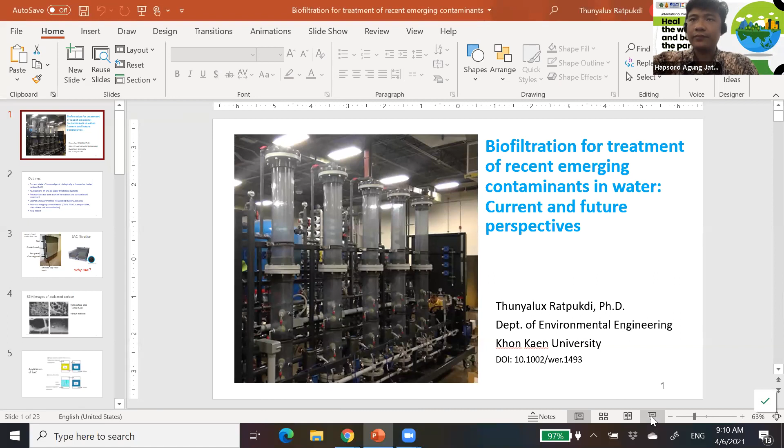For the virtual conference - actually this is my first time joining a virtual conference. So let me begin with my presentation. I believe I have to share my screen, right? Can you share your screen, Professor? Yes, yeah, okay, you see my screen? Yep, yes yes okay. All right then, so it's okay.

First of all, my name is Thunyalux Ratpukdi, you can call me Tom. I'm an assistant professor in the Department of Environmental Engineering, Khon Kaen University, and I'm now serving as department chair. It's glad to be here, and I got invited from a university in Indonesia, which is my first time, I'm very excited.

The topic that I would like to share with you today is biofiltration for treatment of recent emerging contaminants in water, and current and future perspectives. You might have heard about biofiltration, or you may not, but actually it has been with the water industry for, I think, more than 20 years, but we're going to see the development of the current use of it now.

The picture here that you can see is the pilot scale of biofiltration columns. We actually use it in water treatment, but this is a setup for the pilot scale here.

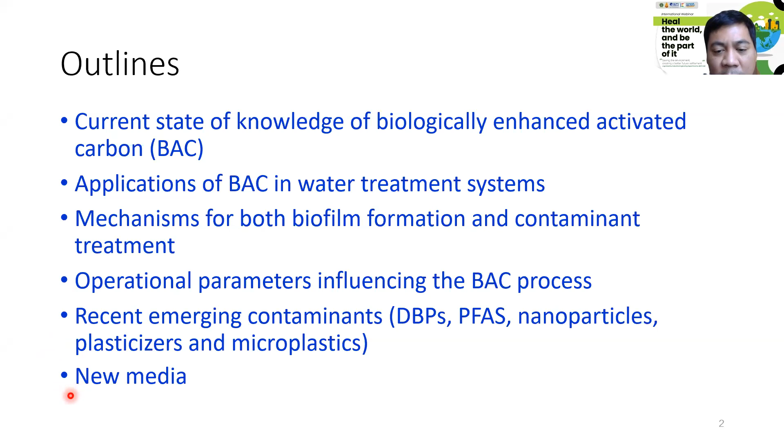Let's begin with the outline of the presentation today. I'm going to talk about the current state of knowledge of biological enhanced activated carbon filters, and the applications we have used in water treatment. Next is the mechanism of biofilm formation and contaminant treatment, then the operational parameters that influence the BAC process, and the performance for treatment of emerging contaminants that we're concerned about now. We're also going to talk about new media that have potential for development in treatment.

This is very typical of water treatment processes we have, like conventional treatment for a big city. This filters the water to make it much clearer, and also helps remove some of the pathogens. This is one of the processes, and then we do disinfection using chlorine.

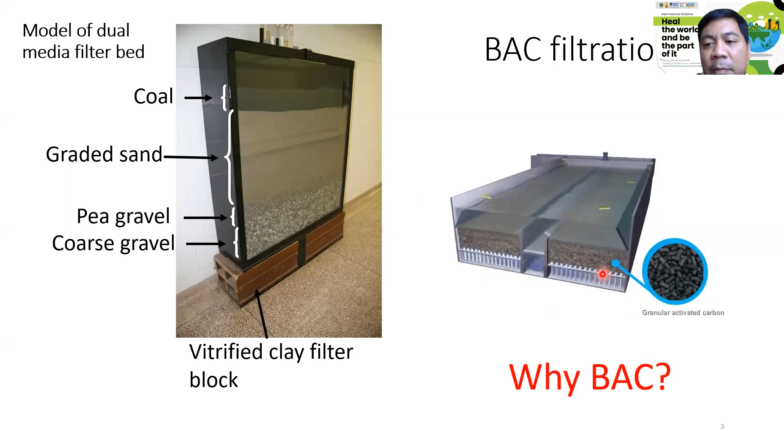The difference between the two is that we also have some biological activity going on in the sand filter, but in activated carbon we can have more. The reason we can have more biological activity going on is because in the structure of activated carbon there's so much surface area - we're talking about a surface area of about 1,000 square meters per gram. So there's a lot of pore structure inside that can adsorb the contaminant, and also provide space for the microorganisms to grow. This is the advantage of using activated carbon as a filter media.

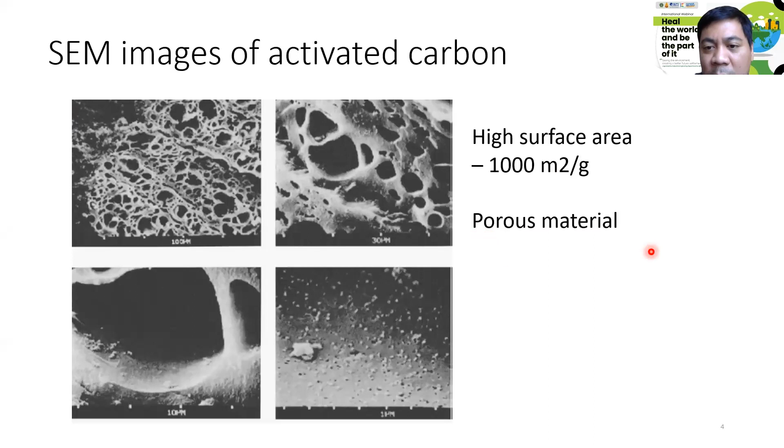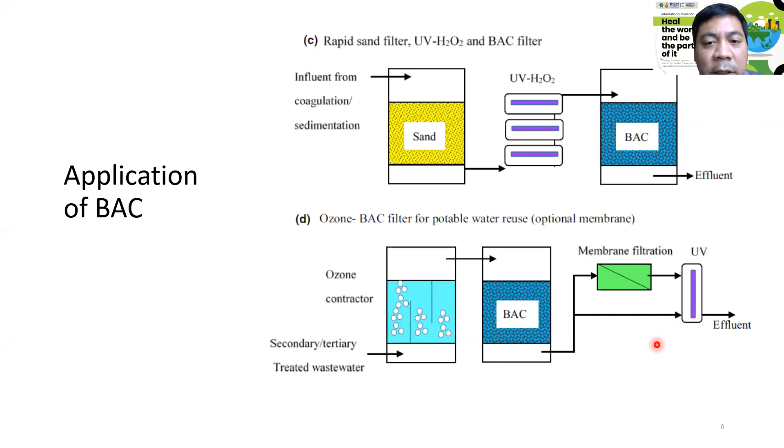Okay, so these are examples of the BAC application, and how biological treatment works and how it happens. When we look inside the structure of the biological activated carbon, we're going to have what's called biofilm formation.

This biofilm is formed from small, numerous microorganisms. They start to attach on the surface, and they start to grow more, and they form a colony, and from the colony they release a substance to help them attach to the surface. After some time, when it gets mature with too much population, or there's some shear force of water, they start detaching, and then start attaching again. The water flows, they attach, form the biofilm, and then start spreading again.

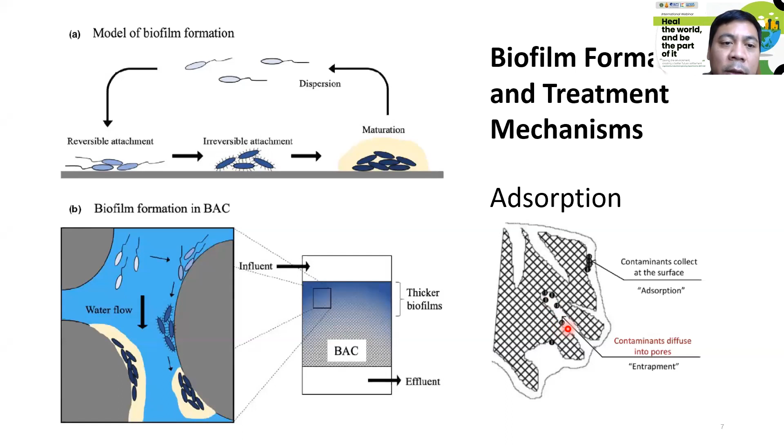This is because of the activated carbon - it serves as an adsorption mechanism. But you can see after several months, this is going down because all the adsorption capacity has been used up. But it's not used up by 100%. We still have capacity for removal of TOC. This is because we have biological activity going on here, so it can remove the organic contaminant. So this is how it works.

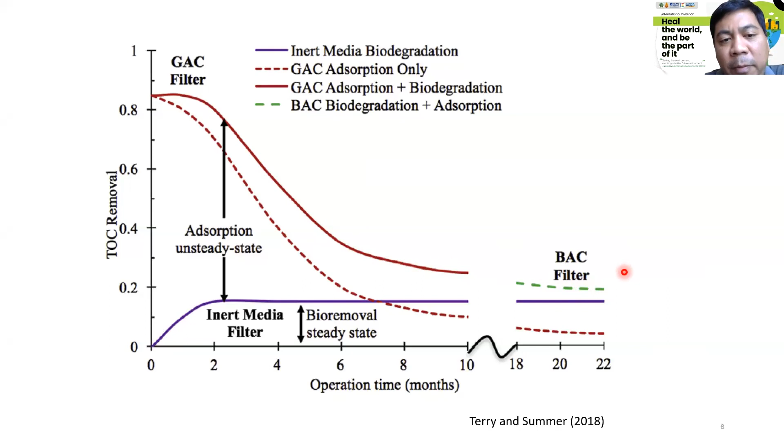You're gonna see in the first period it can remove very well - this is because of adsorption. Once the capacity of adsorption is exhausted, there's only biological activity going on, but it takes several months. So why is this beneficial? Because if we use activated carbon only for adsorption, we may have to replace it every 6 or 8 months. But if we use it as a biological activated carbon filter, we can use it for 2, 3, or 4 years before we replace the media.

Now, what conditions affect the performance? The first thing is pH of water. Lower or higher than neutral, than 7, we're gonna have less integrity of microbial cells, less biofilm formation, and less microbial activity for contaminant transformation. So higher or lower than 7 is not good. We try to keep it around neutral - that's better. It can be off a little bit, but it shouldn't be that much off.

Another concern is the contaminant. For some substances that we put in the water, it will promote biofilm formation. But a lot of times we have toxic contaminants that come into the water, so it reduces the biological species, the microbial community. Like first we might have 100 types of bacteria, but when we have a toxic compound, it kills most of it, so we just have few microorganisms, which is not good. You have to have a diversity of microbial population in the filter, and sometimes it can form persistent byproducts in treated water, which we don't want. So this is very important when we use the biofilter - we have to make sure that we will not create more toxic compounds in the water.

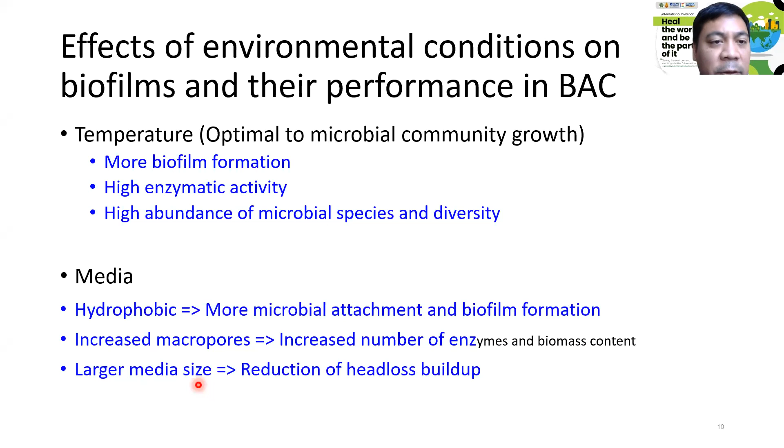So now let's move to the contaminant.

In the past, we talked about conventional contaminants, for example turbidity, natural organic matter, taste and odor, heavy metals, and nutrients. Lately, we have what we call emerging contaminants, a new class of contaminant that has more effect on people, and the concentration is very low, like nanogram per liter or part per billion level.

These compounds include pharmaceuticals, hormones, pesticides, hydrocarbons, and MTBE. MTBE is the compound added into gasoline to prevent the engine from knocking, so it's an anti-knocking agent. I believe this compound has been banned in the US, but I'm not sure about other countries. This is one of the bad compounds that have been invented, and it has contaminated groundwater in many places in the world.

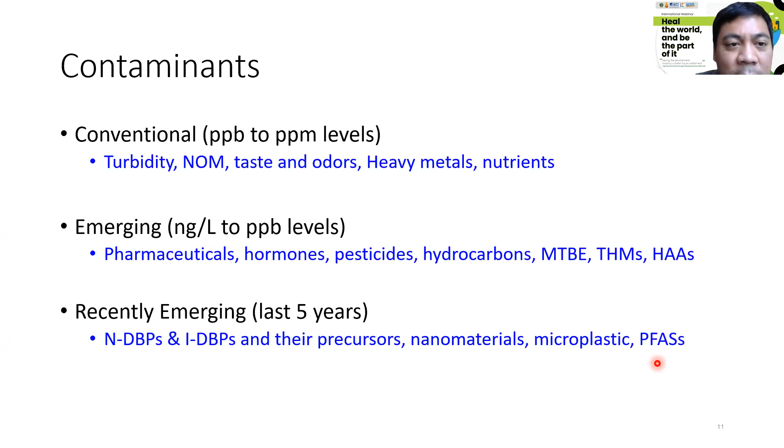These are examples of disinfection byproduct compounds. We have the DBP class, and the white ones here, THM and HAA, these are disinfection byproducts, but not really recently emerging. The yellow ones here are very new compounds. Most of these compounds are nitrogen- and iodine-based.

Some of these compounds can be removed by BAC, but some cannot be removed by BAC. What this means is that our technology today may not be able to treat some of the disinfection byproducts, but our technology can treat some of them. So we have to be careful about monitoring the compounds that cannot be treated by BAC, and find another way to deal with the problem.

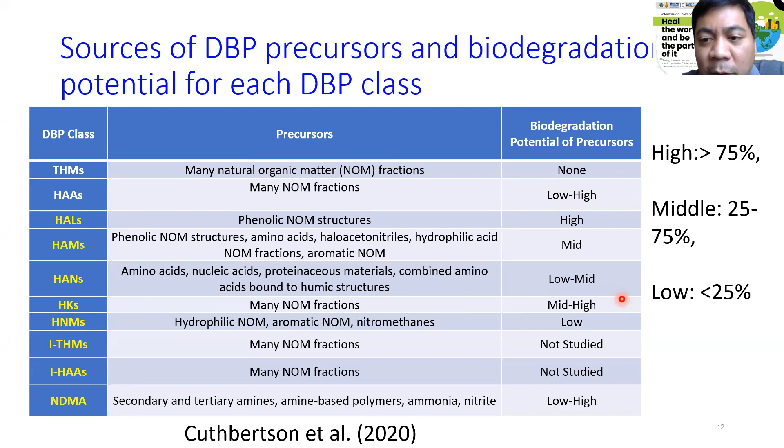Another factor that affects BAC is the number of bed volumes treated. This is called NDMA, another disinfection byproduct compound which is also carcinogenic. This water has been treated with ozone and passed through a biofilter. It has been tested for almost 400 days, and the bed volume treated is up to about 70,000. But in the first period, when the adsorption capacity is kind of exhausted, the capacity is gone.

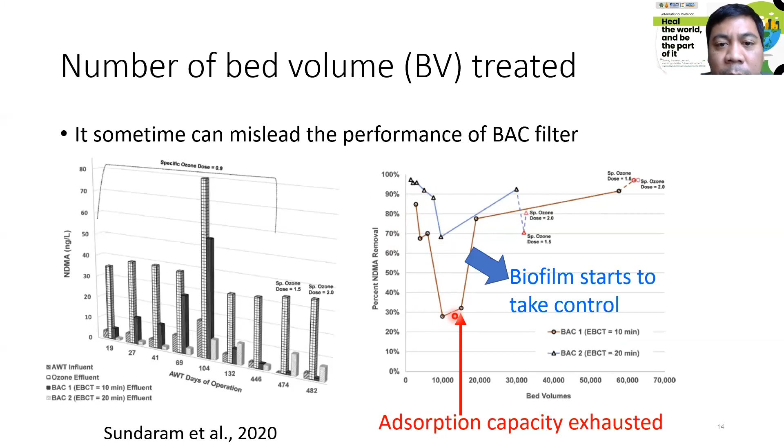Another concern is sometimes we have release of soluble microbial byproducts. This is the fluorescent image showing before - this is a new filter, and this is an old filter. We have an increase of the compound that fluoresces. What happens is it will contribute as a nitrogen disinfection byproduct precursor, so that's another thing we have to be careful of when applying the biological activated carbon filter. What we can do is keep cleaning it by backwashing, so that it will not release as much of the soluble microbial byproducts.

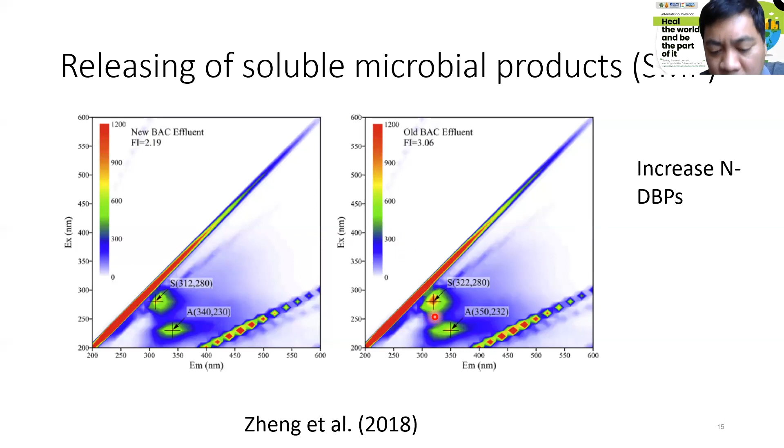Another compound - nanoparticles. We have zinc oxide nanoparticle, cerium oxide nanoparticle, sometimes coated with PVA, which is kind of a glue. We have titanium dioxide, silver nano, silver citrate. These compounds are very stable in the BAC filter. They could be removed by the biofilm, but they have an effect on the biological activity in the filter. It could inhibit AOB, ammonia oxidizing bacteria, and lower the number and biodiversity of the bacteria. So this is one thing that affects the biological activity in the filter.

These days we're going to see a lot more nanoparticles - for example, used in detergent to clean clothes in washing machines, or used in cosmetic products. So we're going to see a lot more of this problem.

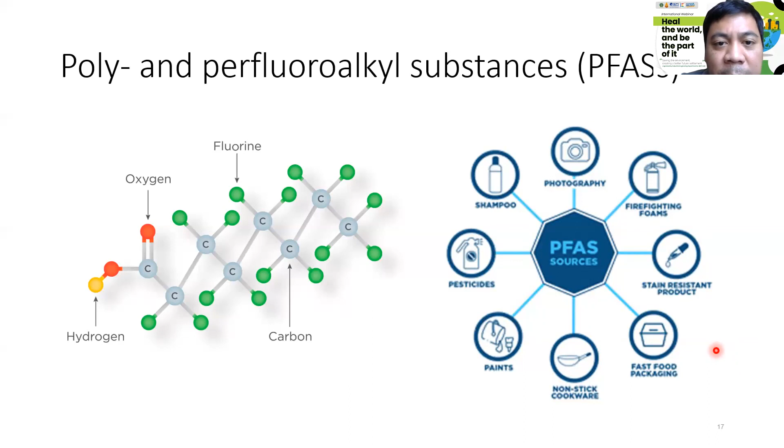The biofilter was found to not be effective for PFAS removal. The main removal mechanism is by adsorption, and activated carbon worked for long chain - carbon more than 6 - but not for smaller chains, carbon less than 6, so it doesn't work there. So it's something we have to look into, what we should do next with this compound.

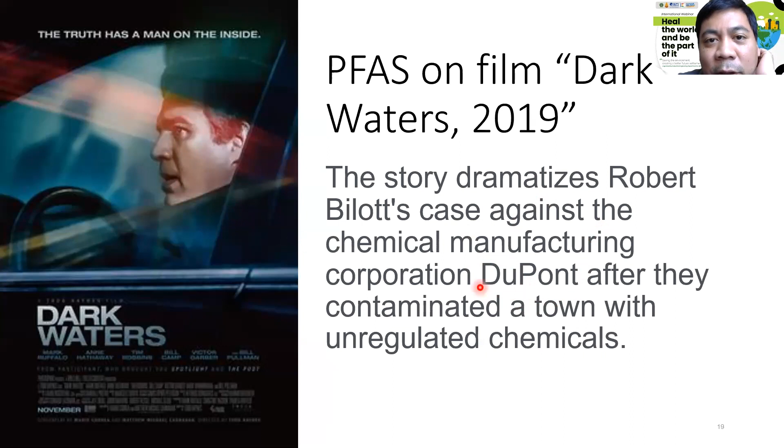It's very challenging. But if you want to know more about this compound, there's a movie called Dark Waters, from 2019. The story is based on real events in the US. If you're interested, you might want to follow up - I'm not sure if Netflix has this movie yet, but it's very interesting, and the actor is the guy who plays Hulk in Marvel movies, same actor. I haven't seen it yet, but I think it's a good one for environmental application - DuPont is responsible for the PFAS contamination in the story.

For the last slide here - a new media, biochar. Why are we talking about biochar? Biochar is the material used in agriculture to hold soil moisture. It has been used there, but it's very new for the water treatment industry. Why are we interested in biochar? Because it has less cost compared to GAC, and it can be modified to be a new media, a new material. So we're looking forward to development of biochar. Biochar basically is biomass that we burn as char, but it's less processed compared to activated carbon. We're looking forward to development of the biochar as a new media, or modified biochar. The biochar also has pore size, so it can adsorb contaminants.

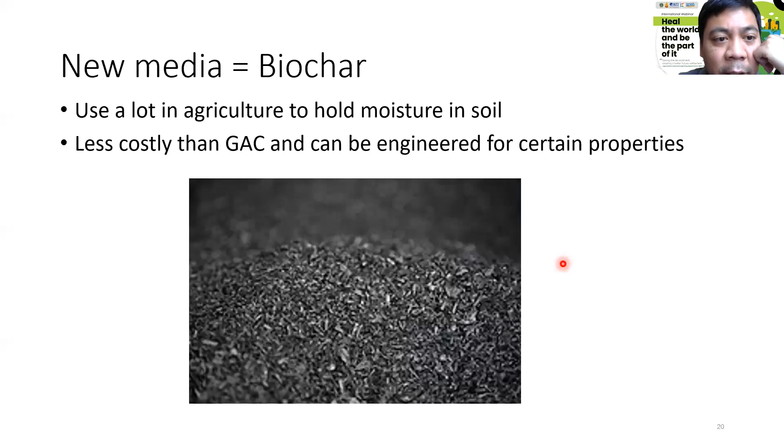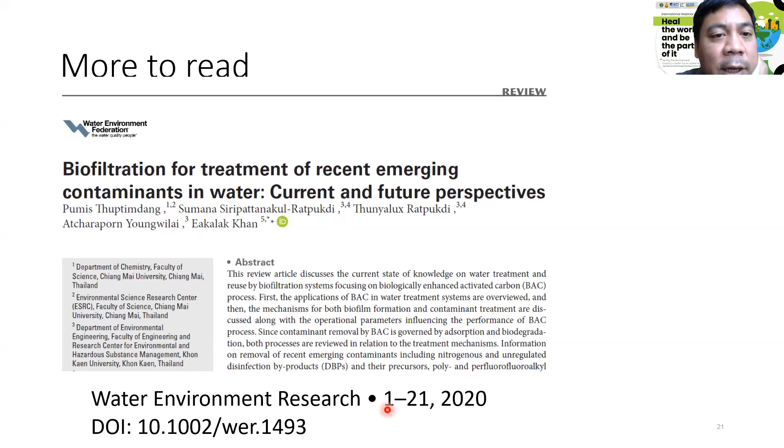Finally, if you are interested in the topic I talked about, we recently published a paper here. I already sent the file to the conference organizer, so you may ask them, or you might be able to download it online - I put the link with the DOI here. With that, I would like to thank you all for your attention, and I'm here to open for questions.

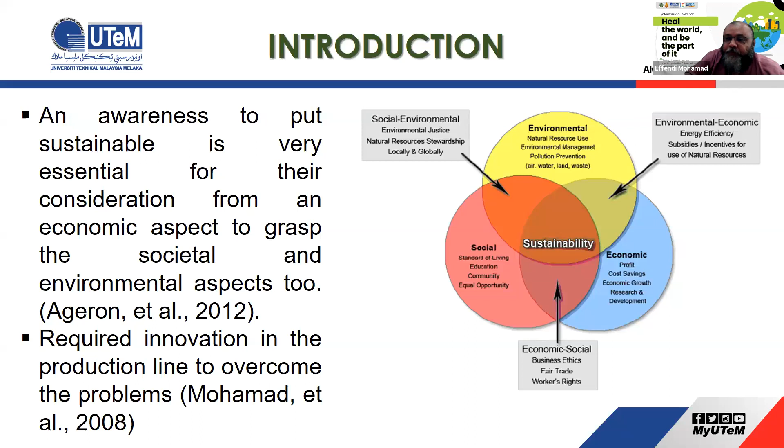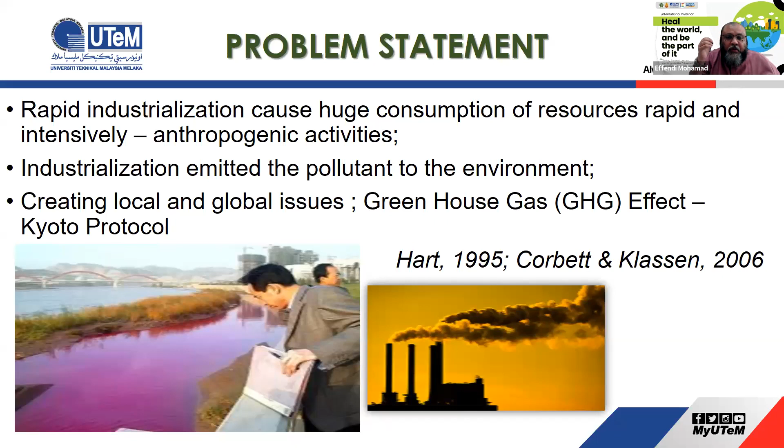Throughout the years of industrialization, the environment has become severely polluted and contaminated, so legal requirements are enforced to ensure proper waste management in all industries. For example, we talk about local and global issues like the greenhouse effect and the Kyoto Protocol, industrial-emitted pollution to the environment, and rapid industrialization causing huge consumption of resources rapidly and intensively.

This led to the idea of using cleaner production and also lean manufacturing. Cleaner production is a method to minimize waste and pollution to the environment, and lean manufacturing is a method to improve the production process by eliminating waste.

In 2002, Bushell said that lean manufacturing seeks to make the most efficient production process by eliminating waste at every stage of the production chain. Lean manufacturing is actually one of the philosophies taken from the Toyota Production System.

All the theory or fundamental story came from TPS. James Womack, who was from the US, in the early 90s the US had problems, so they learned manufacturing from the Japanese company Toyota and then created the idea of lean manufacturing. But the basic fundamental understanding is TPS, Toyota Production System.

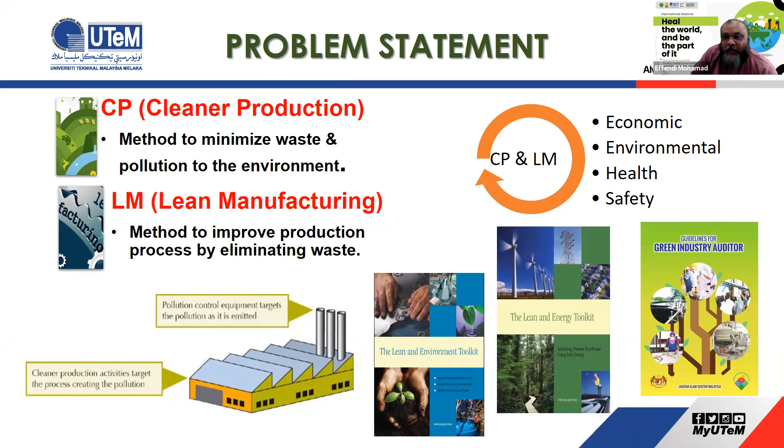So I hope by now you understand what my idea is. Don't worry, I will give two case studies, real case studies we have done and solved using this EVSM, or extended VSM, which we call CPVSM.

So LM and CP, lean manufacturing and cleaner production, have the same objective to reduce waste, that we know. Both lean practitioners and environmentalists want to see environmental waste in the process reduced and hazards to work minimized.

In Malaysia, the problem, as I told you before, is that SMEs with small scale, below 20 permanent workers, find it difficult to achieve the requirements, because the majority of them, since the number of workers is small, need to do multitasking jobs. So I think this is one way that can help them strategize, implement a Kaizen team, and solve the problem of CP by using extended VSM.

So this is VSM. Maybe some of you know what VSM is—value stream mapping, like I told you before. In VSM, all the information on material and information flow mapping is there.

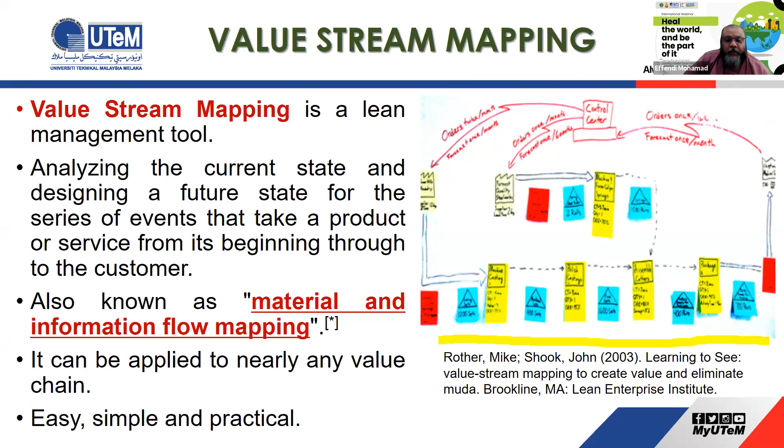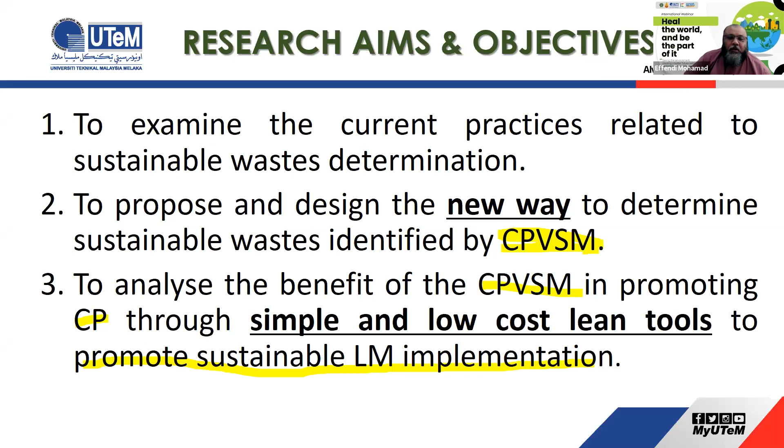And then we try to design and develop the CP VSM, and then we evaluate and validate that, and then we try to propose the new model. This research started from 2016, and we continue to improve it till now. So the research is still continuing till now.

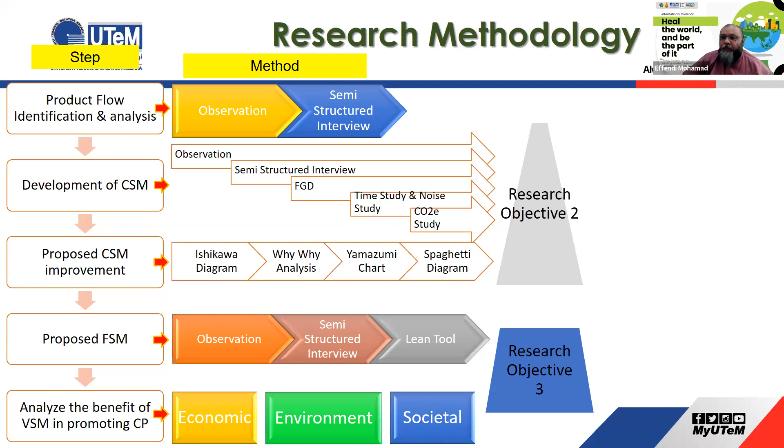Again, we're talking about cleaner production and how we want to combine cleaner production with lean manufacturing. We pick VSM as one of the lean tools, and we make the CP-VSM as the extended value stream mapping to combine CP and to settle the issue of economy, environment, and societal metric assessment. This is the research flow.

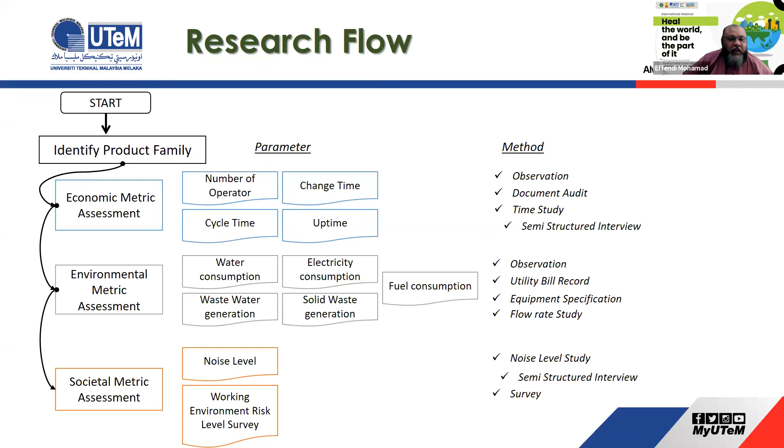So this is how CP and lean manufacturing have become an important synergy, and this shows how we construct the CP-VSM.

As can be observed, the framework to extend CP-VSM is to assess sustainability performance comprehensively, to be considered a sustainable tool due to the counting of environmental metrics and social metrics. So the comprehensive CP-VSM for sustainability must not only serve as a tool to help identify areas of potential economic waste, but also environmental and social waste impact.

Now I'll show you an example case study. This is a real case study of a company we call ABC Recycling Sdn Bhd, located in Seremban. It's an SME company. The products are copper chips, fiber powder, precious metal, plastic, and so on. The number of operators is around 15, and we've been here since 2009. This is the location in Malaysia.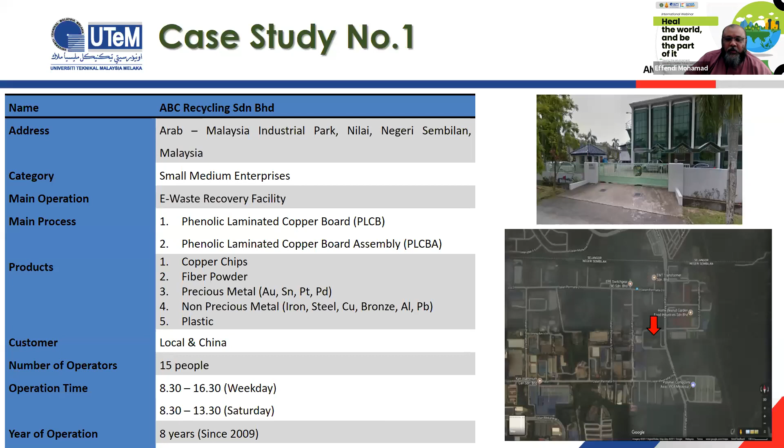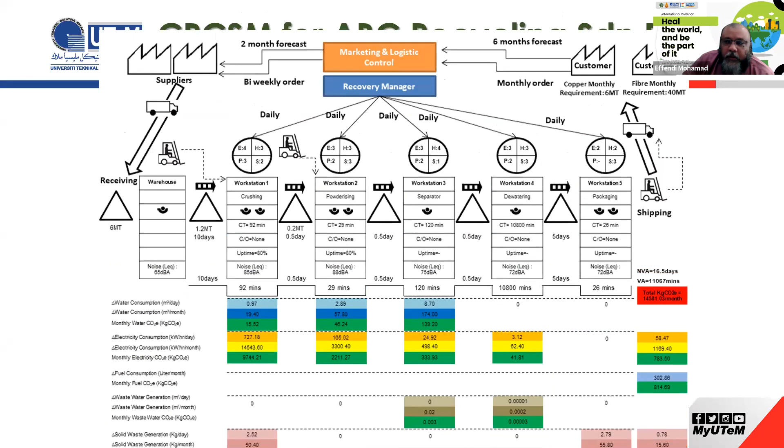So based on the CP-VSM, what we need to do, like I told you before, is once we have all this information, we know where the problem is in the production line, and from there we want to tackle which part is the bottleneck, whether it's a water consumption problem, or the monthly carbon footprint and solid waste, to identify which one is a problem and which one is not. Based on that, we try to improve by using takt time analysis, Ishikawa diagram, why-why analysis, and so on.

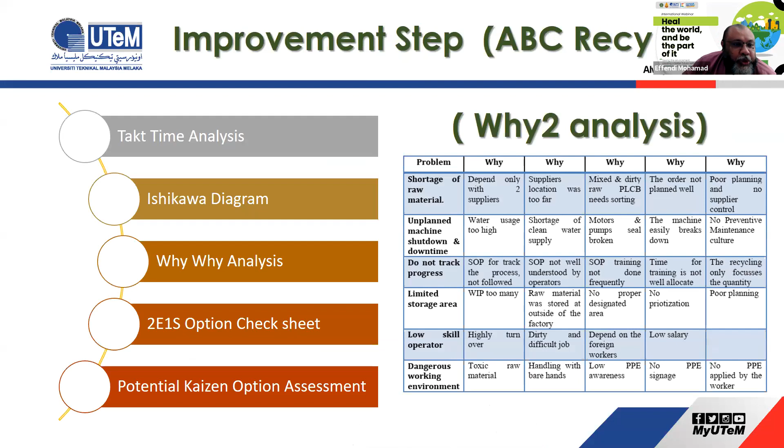So we have done why-why analysis, and on top of that, this is the issue we found: long waiting time, and the workstation receiving and crushing. For expected outcomes, we want to tackle economy, environment, and social aspects. For economy, we're talking about transportation, waiting, inventory, and motion. For environment, we're talking about reducing electrical usage, reducing fuel usage, and reducing solid waste generation. For social, we're talking about noise level and high speed components. This is the detailed information, and the outcome is this new procedure is expected to reduce issues by 50% and so on.

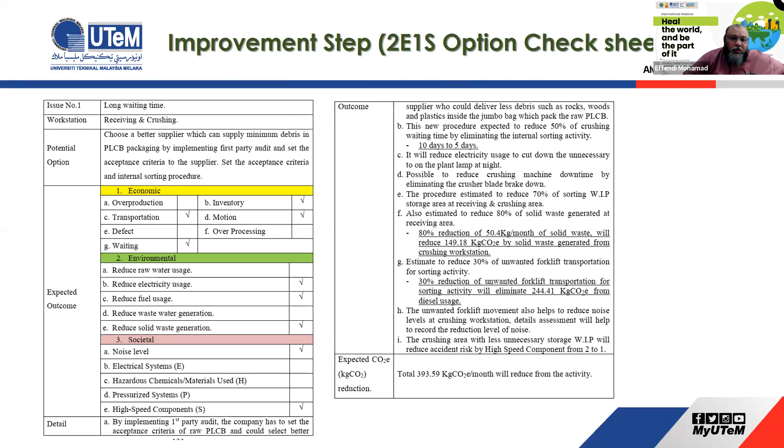We will reduce electricity usage, cut down and so on. So how do we want to settle it? Not only by using a check sheet, but we try to see what potential Kaizen can be implemented. What can we do based on the value stream mapping, we develop the CPM, the CPVSM, and then we try to get why-why analysis, and from there we try to get Kaizen activity.

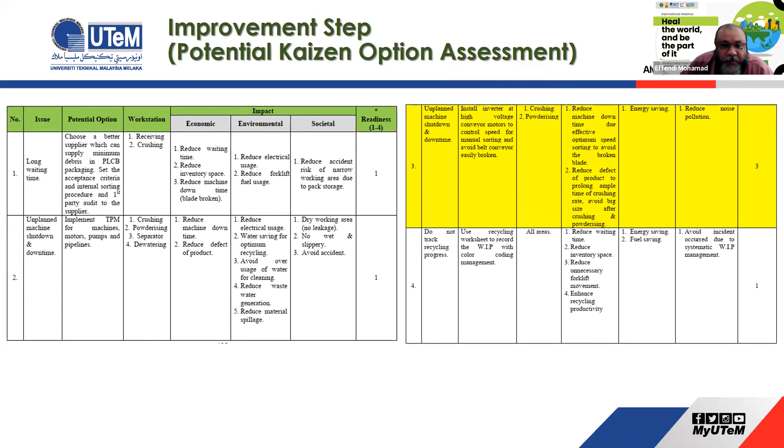For example, here, long waiting time, unplanned machine shutdown and downtime, unplanned machine down, they have installed an inverter, for example. So this is a potential option that we give to the company, right? And then we try to implement. This is many activities that we have done, right?

Okay, do not track the recycling process. So for example, our suggestion is implementing FIFO by palletizing storage of PLCB and product, all right? So many things have been suggested to them to try to improve.

As a summary, this is the suggestion for improvement at ABC Recycling Sdn Bhd. For example, perform first party audit of supplier and set acceptance criteria, implementing TPM on all machinery and related equipment such as motor, pump and pipeline, implementing FIFO, implementing 5S and work in progress temporary storage area, impose proper PPE application, signage and scheduled training.

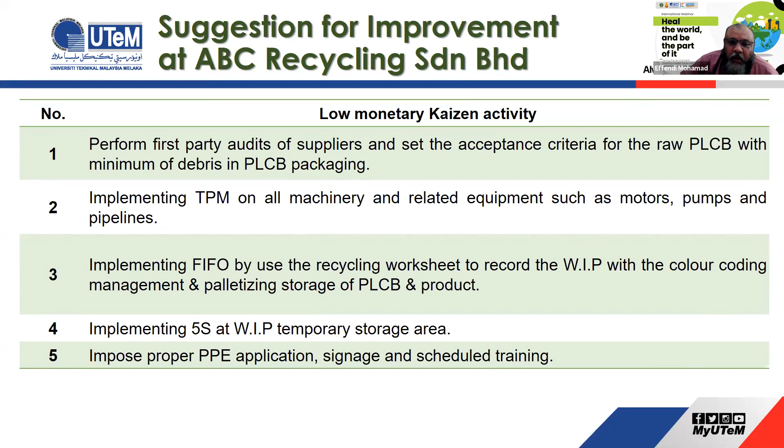So we can see the good thing about value stream mapping, as I told you before, when we map all the value stream, we can see everything. And then when we combine it with the CP information, and try to implement Kaizen based on the CPVSM, this idea came, right? You can see how powerful the tool of VSM is.

So this is the CP, this is the CPFSM. Before this is the CPCSM, which is the current state map. This is the future state map, whereby based on the Kaizen, we try to do improvement, and this is the result.

For example, for workstation 1, we try to improve by using 5S, PPE, TPM, and FIFO. For workstation 2, we plan to implement the same thing, and so on. And then from the warehouse, we try to implement 5S and FIFO.

And what is the result? That is the thing that we want to know, right? Because when a company does collaboration, they just want to know the result. We as academicians are more focused on the theory part, to prove our theory and so on. But usually the company is straight away - they want to know what method, they don't care. What they want to know is whatever tools or things we implement, will they also get a benefit.

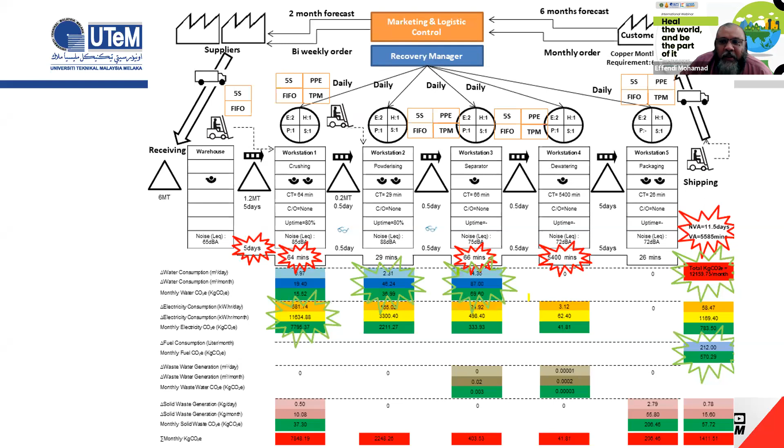And also the crushing workstation, before this, the value added was 92 minutes, and the carbon footprint was more than 9,000. And after that, it's been improved. You can see this is all the information in each workstation, right? Each workstation.

Alhamdulillah, we managed to show and convince them. Like I told you before, if it's a real CSM, we're just talking about the economy part. But now we're also talking about the environmental part too, whereby the carbon footprint has already been reduced. This is a more important thing, right?

And on top of that, before this, the company didn't have any calculation. So when we came, we calculated for them, we showed them - you need to measure using this calculation based on the standard calculation, right? Yeah, we can see how reduction has been done by using the CPVSM.

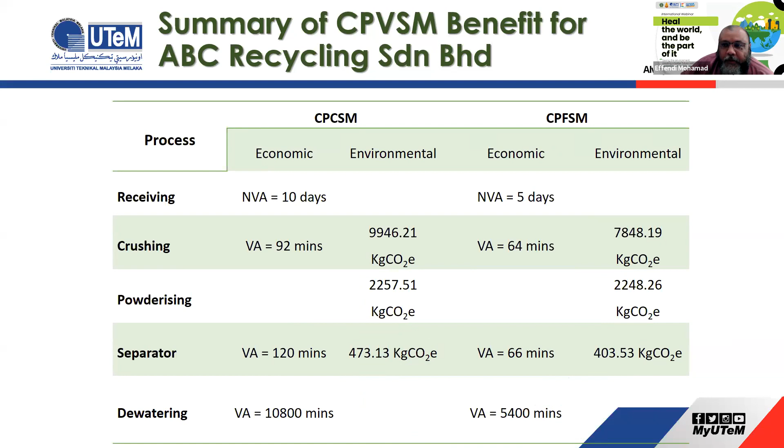Okay, on average, they can reduce 5 days for non-value added, 5,482 minutes of value added, and reduce almost 2,000 in carbon footprint.

And if I try to do some summary - this indicator, we're talking about the electrical system, hazard, pressure system, and high-speed component. The calculation is based on this indicator description. So we did some survey, and then we got all this data, right? You can see the improvement of each workstation.

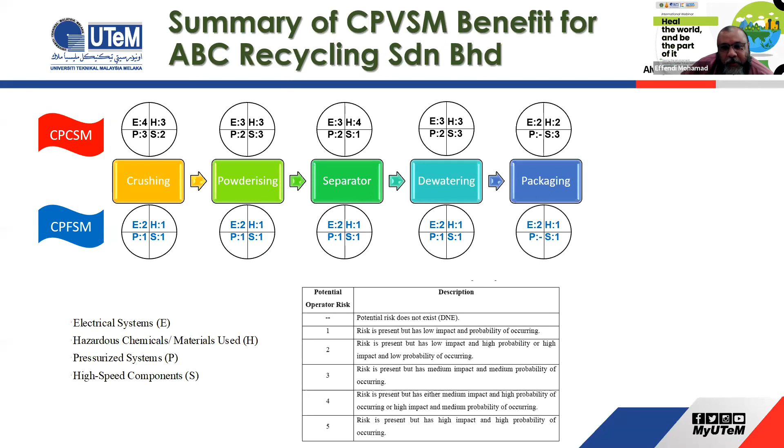So this is the CPCSM, the current state map. This is the future state map after we do the improvement. So we tackle all the aspects, right? Okay, you can see this. So I'll go very fast, and this is the overall improvement. You can see before and after, right? The electrical system also has been reduced, and so on.

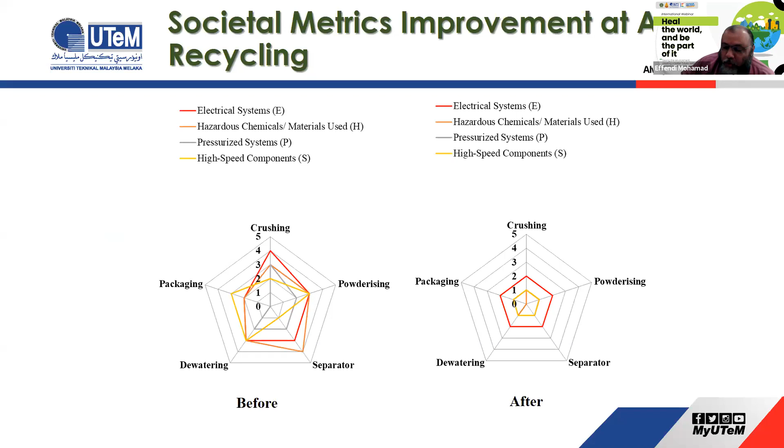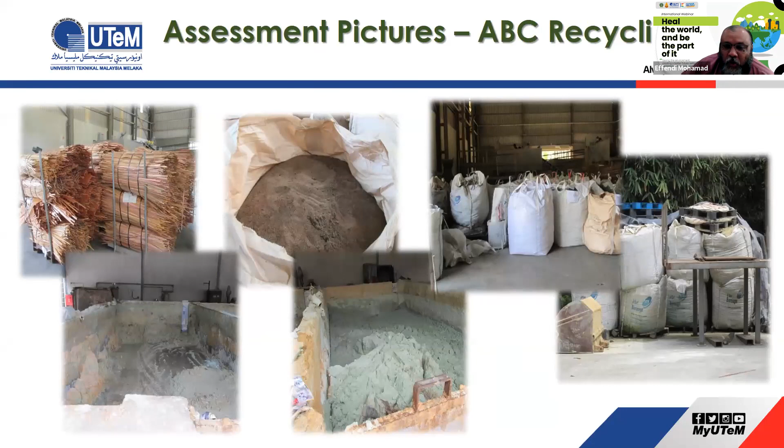So for assessment, this is an example of a picture. The company is in charge of all the wastes, right? So we help them, whereby we implement, like I told you before, 5S, FIFO system, and we found that some of the machines don't have any preventive maintenance. That's why they always have idle time, and the OEE is quite low. So that's why we try to improve that by implementing TPM, total productive maintenance, right?

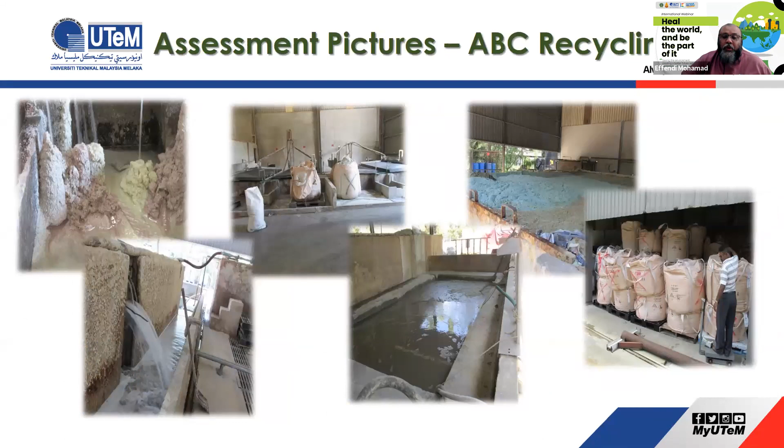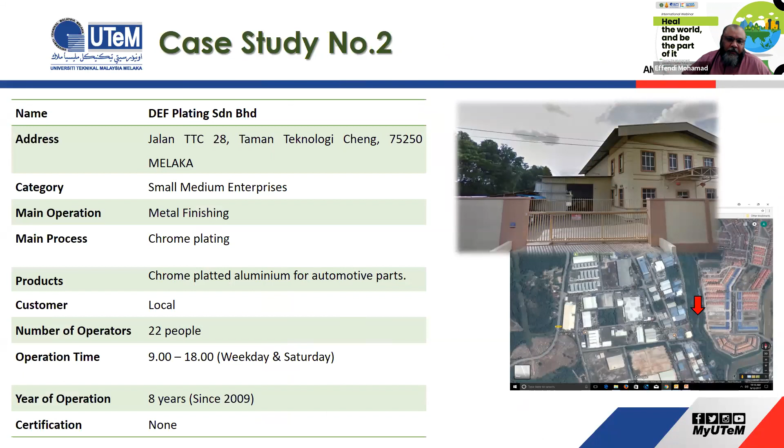So this is all the example. On top of that, to make sure to verify, not only verify but validate our theory at the time, we try to implement it at another company. This company is also a plating company. They have quite a lot of issues also, but it's okay. So this is the CPCSM.

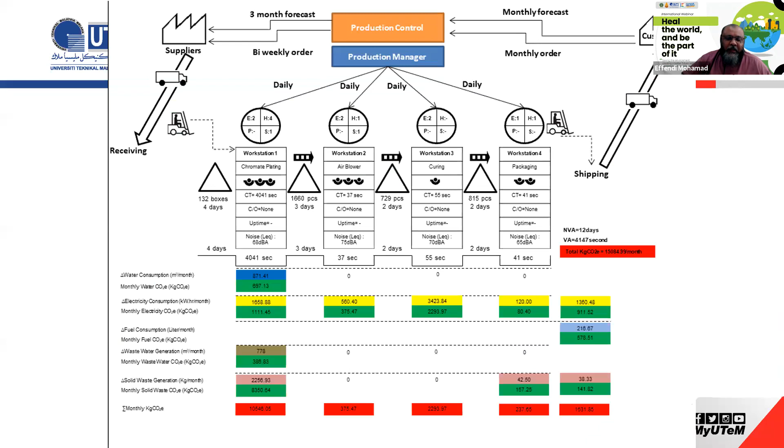So I'll just cut to it. This is the value stream map that we have done. To cut the story short, this is the suggestion for improvement whereby we try to implement Pokayoke, and also implement TPM, impose proper PPE application, signage, and scheduled training. You can see that we enhance the process control by adding measurement devices such as a flow rate meter and level sensor for optimal solution control.

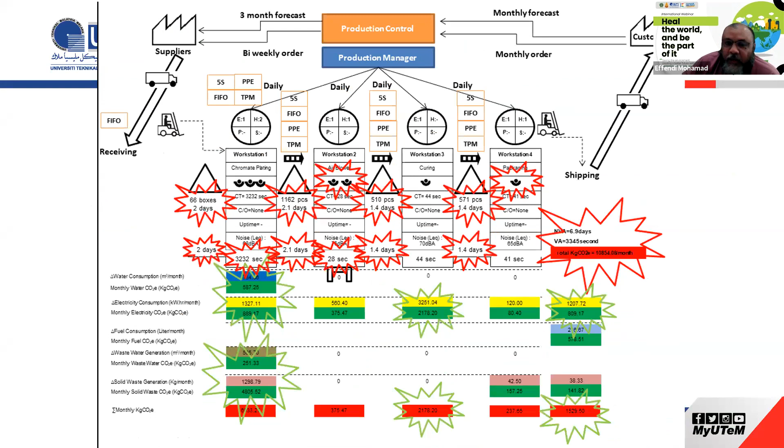So everything here, all the information that we get when we do the CPCSM, we try to give a suggestion to the company and try to implement it. And after that, based on our suggestion, this is the CPFSM, whereby improvements have been done. This is the improvement that has been done, and this is the benefit that the company got from the process, from the CPCSM to the CPFSM. So the cleaner production current state map and cleaner production future state map. So we can see the improvement here.

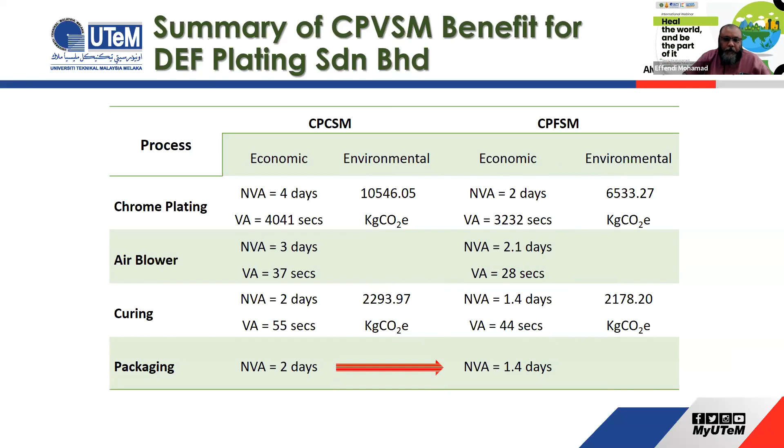All right, I'll go very fast. So on average, we managed to reduce 4.1 days of non-value added time and 802 seconds of value added time, and reduce the carbon footprint.

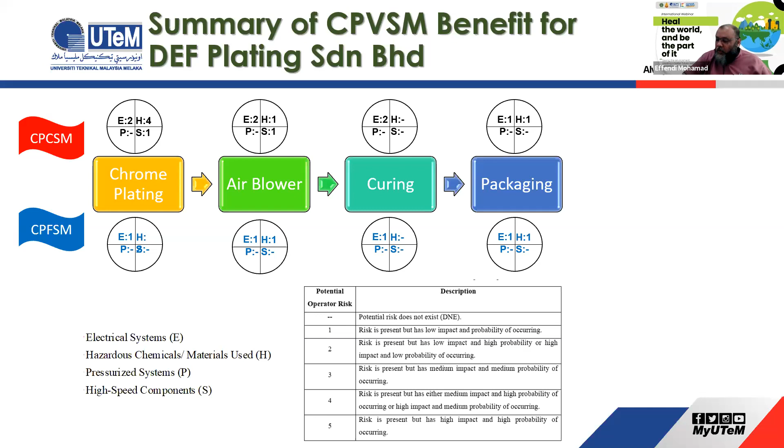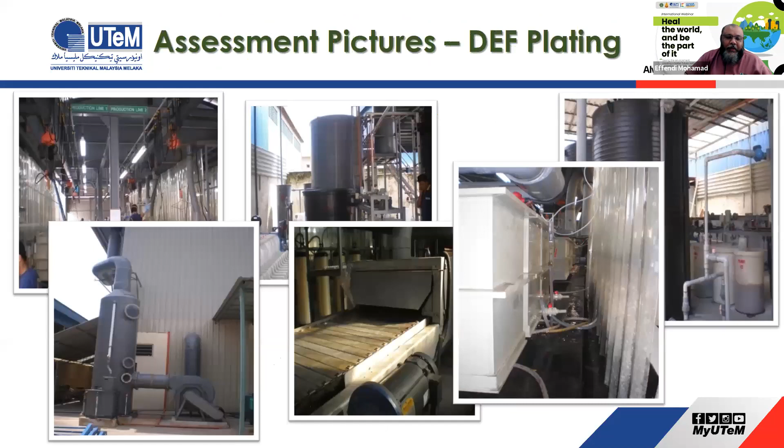Okay. So this is the comparison that I told you before, whereby we can improve overall, a comparison between CSM and FSM at ABC Recycling and a comparison between CSM and FSM at DEF Plating Sdn Bhd, whereby here it's 10 days going to 5 days and so on.

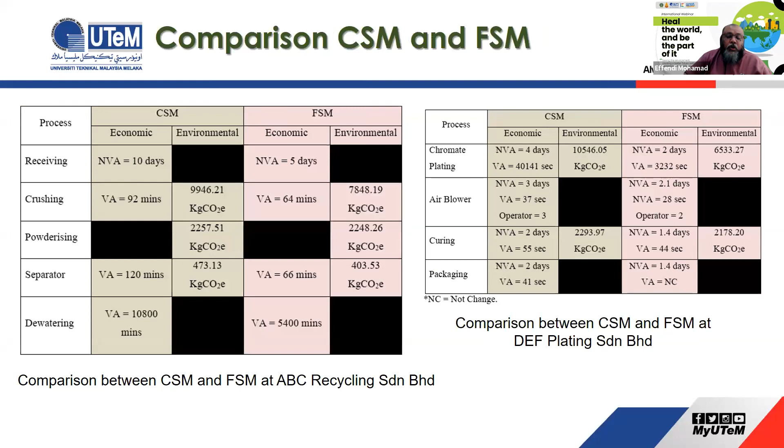So in conclusion, the CPVSM is a useful tool to identify sustainable waste, whether economic, environmental, or safety related, and so on. It also gives better visualization for each sustainable waste at every workstation, exact hotspots and correct points of sources.

Before this, when we don't have the VSM, we don't have the current state map. So when we don't have the current state map, we cannot visualize. But now we can visualize and we can add on the issue, the information of CP, to make the extended VSM more synergistic and so on. And it synergizes with low-hanging fruit for Kaizen activity with minimum monetary and resources, and also serves as a simple, reliable, easy to refer map for continuous improvement by the safety team in the plant.

Okay, so I think I hope you'll understand and get a clear picture of what I wanted to show you. Maybe it's just a simple case study, but even so, it is one step ahead in terms of method, because this method we created ourselves based on the literature review, trying to implement a new method.

And currently we are trying to improve the EVSM more by adding more parameters and so on. So because we believe in this method, it will help this kind of company, the recycling company, because if not, they would just throw the waste outside of the company, and that's not good for our environment. So I think that is all for me.

Assalamualaikum warahmatullahi wabarakatuh. I will present, entitled Reverse Logistics and Handling the Use Cell Phone. I'm Siti Mahsanah Budijati, from Industrial Engineering Department, Universitas Ahmad Dahlan.

There are 8 outlines that I will present. The first is about green supply chain management and reverse logistics, and then types of reverse logistic flow, about e-waste. Fourth outline is about used cell phone. The fifth is actors in the used cell phone reverse logistic, and then drivers of reverse logistic activities. The seventh outline is the handling of used cell phone, and the last is current and future research in the used cell phone handling.

Before discussing further this material, it is better if we first understand the background of the environmental concept emergence in the companies. Currently, the company's attention to environmental sustainability is increasing. There are several factors that encourage companies to pay more attention to these issues: the reduced availability of raw materials, the existence of regulation on environment, the consumer pressure for companies to produce products that are more environmental friendly, and the management commitment to environmental problems.

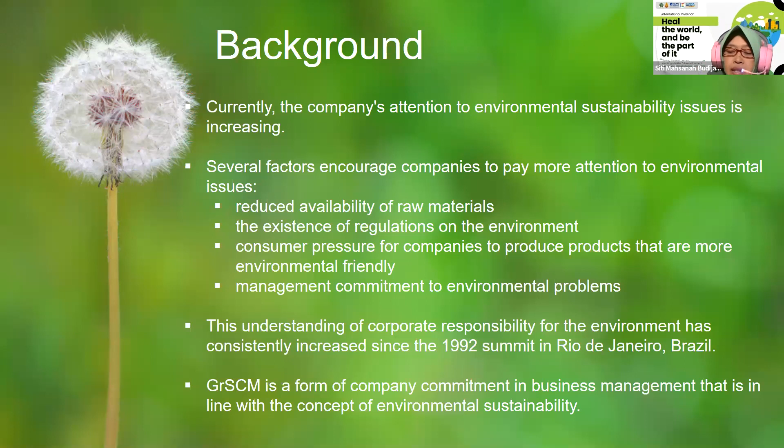So here first, we will discuss what green supply chain management is. There are 2 definitions that I present here, although there are many other definitions from other authors. The first definition is from Wilkerson: green supply chain management is a method that integrates environmental aspects into supply chain management, including the role of the environment in the creation of supply chain value, improving supply chain operation by involving solutions from the environmental aspect.

The second definition is given by Srivastava: green supply chain management is integrating environmental thinking into supply chain management, including manufacturing design, material sourcing and selection, manufacturing processes, delivery of the final product to the customer, and the end-of-life management of the product after its useful life. So it can be understood that green supply chain management is incorporating environmental elements into supply chain management.

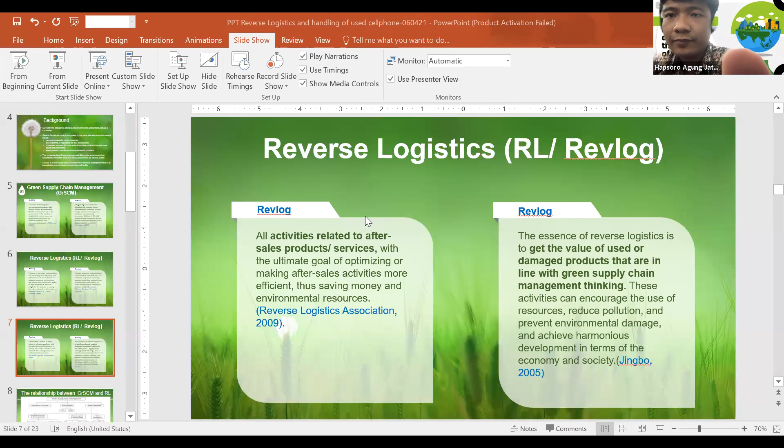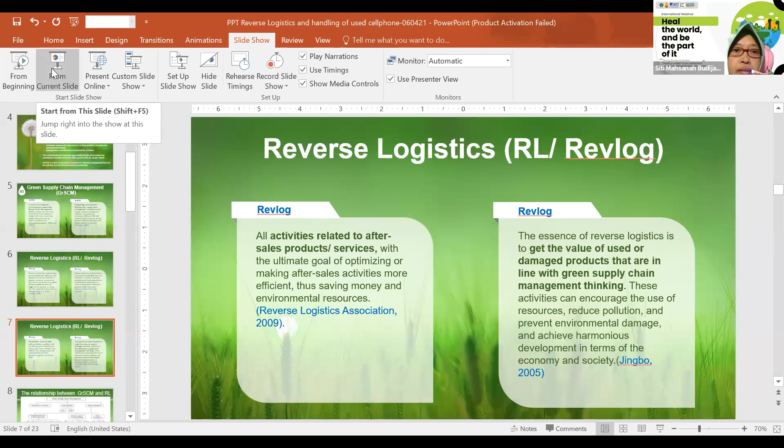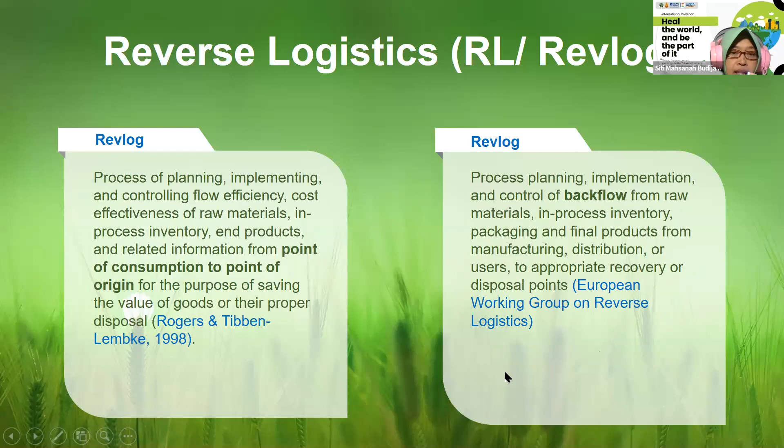Okay, I continue my presentation. We talk about reverse logistics here. There are some definitions that I write here from Rogers and Tibben-Lembke, and from the European Working Group on Reverse Logistics, and then from the Reverse Logistics Association and from Jingbo.

From these definitions, it can be concluded that reverse logistics is the activity of managing end-of-life and end-of-use products from the point of consumption to the point of origin, which is in line with green supply chain thinking.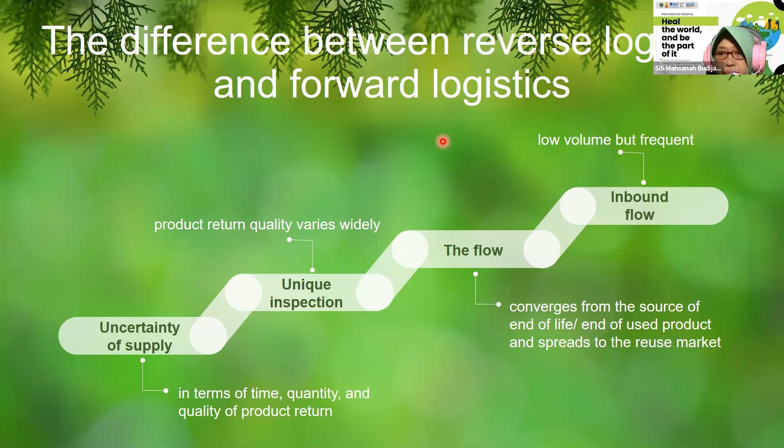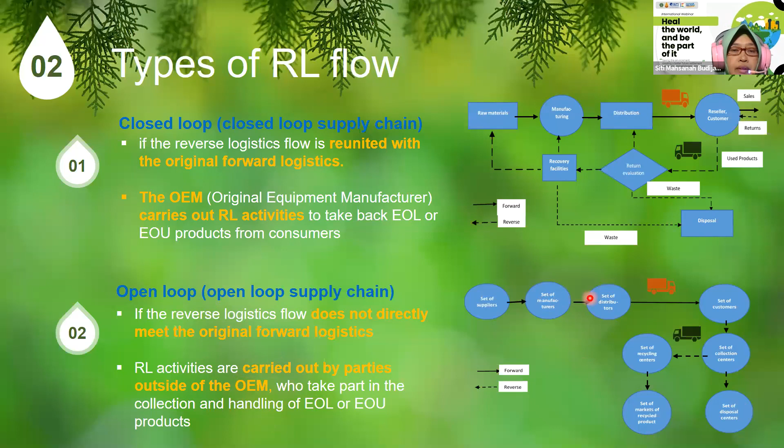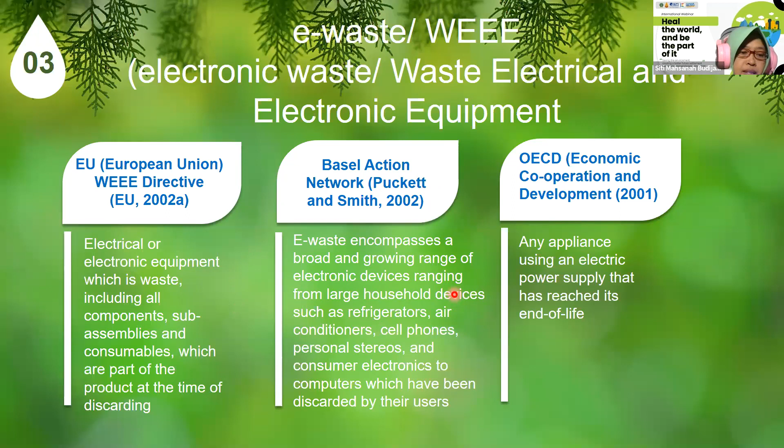There are two types of e-waste: white goods and brown goods. White goods are such as refrigerators, washing machines, and microwaves, and brown goods such as radios, computers, and cell phones. All of these e-waste can be handled by reverse logistic activities.

Now, we will discuss specifically about used cell phones. The used cell phone contains several materials which are harmful for the environment and human health if not handled properly. This hazardous material is like lead, cadmium, mercury, hexavalent chromium, and flame retardant. Cadmium from one cell phone battery can contaminate 600,000 liters of water.

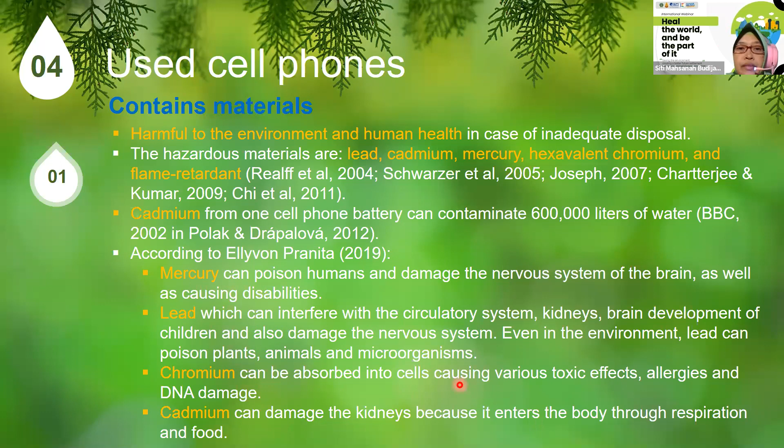Okay, but if managed properly, this used cell phone waste provides several advantages, such as: one recycled cell phone is equivalent to the energy to run a laptop for 44 hours. And recycling mobile phones can reduce the potential for greenhouse gas pollution, equivalent to 4 million motor vehicles.

If Americans recycle about 130 million each year, it would provide enough energy stored for the use of more than 24,000 homes. But if thrown away, a cell phone takes 400 million years to decompose. So you can imagine it takes a very, very long time to unravel a discarded cell phone in the environment.

Your cell phone also contains precious metal such as gold, copper, and silver. This precious material can be reused with the appropriate recycling process.

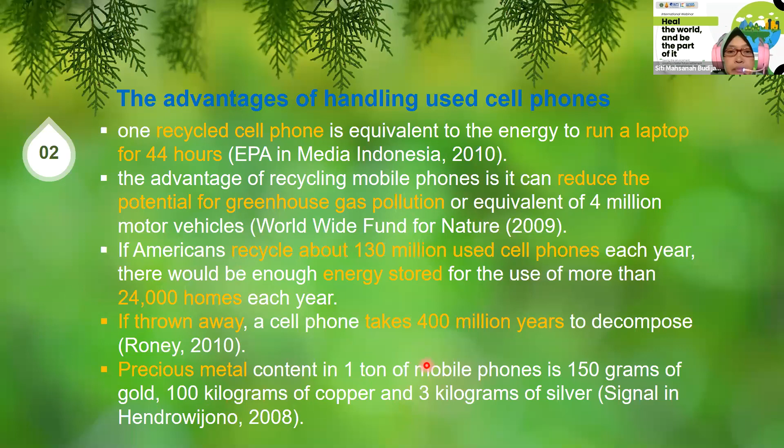Next, we discuss at least 4 factors and actors in used cell phone reverse logistics. The first is the consumer. The consumer in the reverse logistic activity, or end user, acts as a supplier because the reverse logistic takes the end of life or end of use product from consumers.

The second actor is the actor in the formal channel, meaning the OEM parties who take back used cell phones. The third actor is the actor in the informal channel, which is the parties outside of the OEM who handle the used cell phone. The last actor is a regulator or policymaker or government, who is the party that sets rules and policy on the handling of used cell phones.

So these four actors influence the activity of reverse logistic in handling used cell phones.

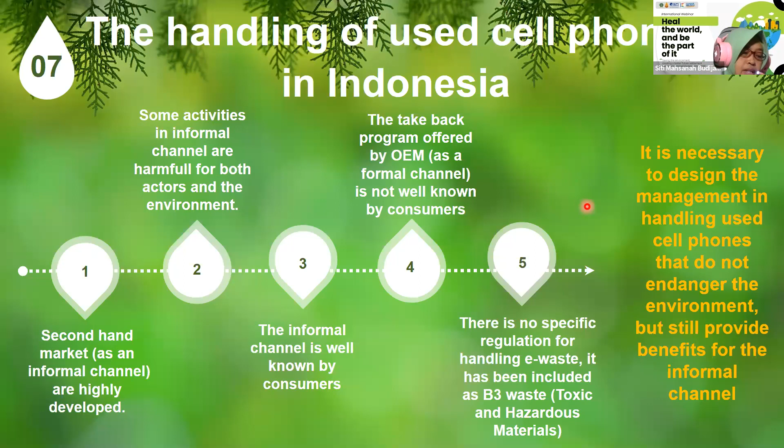With this phenomena, it is necessary that we conduct research to manage used cell phone handling so that the reverse logistics is not harmful for the environment, but still gives benefit for the informal actors. So we did some research in this area.

The following is some of our research that has been done and the future research plan. Our research carried out included exploratory studies on consumers, informal actors, formal actors, and regulation. This is my first research, about the conceptual model of consumer intention to participate in the used cell phone take-back program.

And then the consumer post-consumption behavior. The third research is about the influence of government and economic drivers on consumer intention to participate in the take-back program. And then research about the influence of environmental attitude on consumer intention to participate in the take-back program.

In addition, there is also research in terms of literature studies with meta-analysis, and research on the reverse logistics model that combines formal and informal channels. This is the analysis of the driving and inhibiting factors for informal actors to collaborate with formal actors, the analysis of driving and inhibiting factors for formal actors to collaborate with informal actors, and analyzing the driving and inhibiting factors for formal actors to conduct reverse logistics activity.

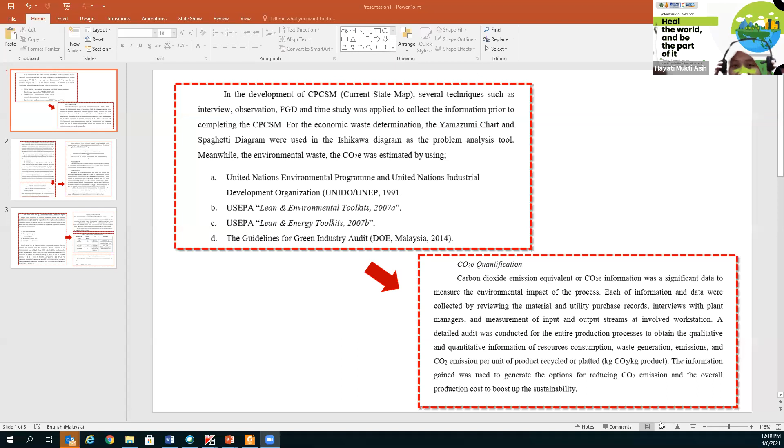Can you see it? Okay, this is how we developed the CPCSM. I already read the question earlier, let me summarize it. So for environmental waste, the CO2e was estimated using United Nations Environmental Program, UNIDO 1991,

USEPA, Lean Environmental Toolkits, and also the guideline for green industry audit, DOE 2014. So for CO2 quantification, basically this is the carbon dioxide equivalent information which was significant data.

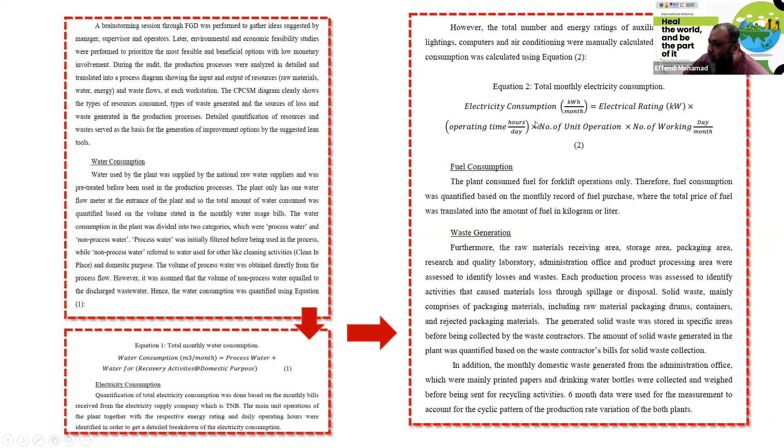Let me explain all of it a little. For water consumption, the equation is like this, and for electrical consumption, the equation is like this. Based on this, in the end, the suggested CP option together with estimated economic return and CO2 emission reduction were discussed in detail in the next section, showing how we calculate the total carbon emission based on raw water consumption information, electrical consumption, fuel consumption, wastewater generation, and solid waste generation.

And this is the emission factor of environmental metrics, right? And then this is the CO2 equivalent emission. So I hope this will answer the question that was asked by Leni.

Yes, Professor. You asked me about how we calculate, right? Yes. So this is the detailed calculation. Okay, thank you so much, it's very clear, Professor, thank you.

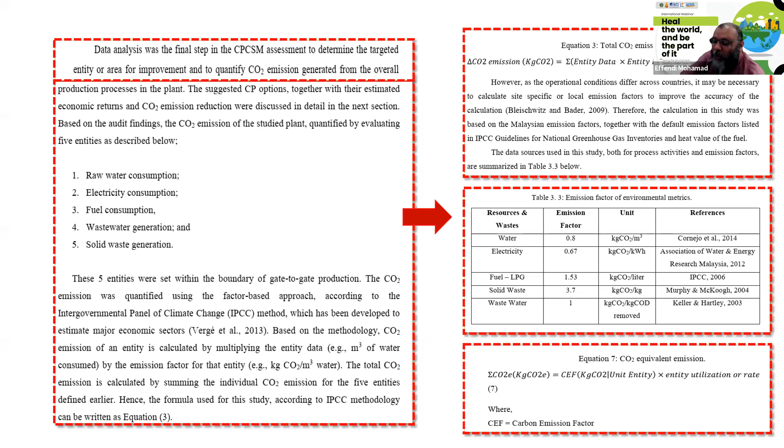And after this, I will try to share the... I will share this. So this is one of our publications. Can you see it?

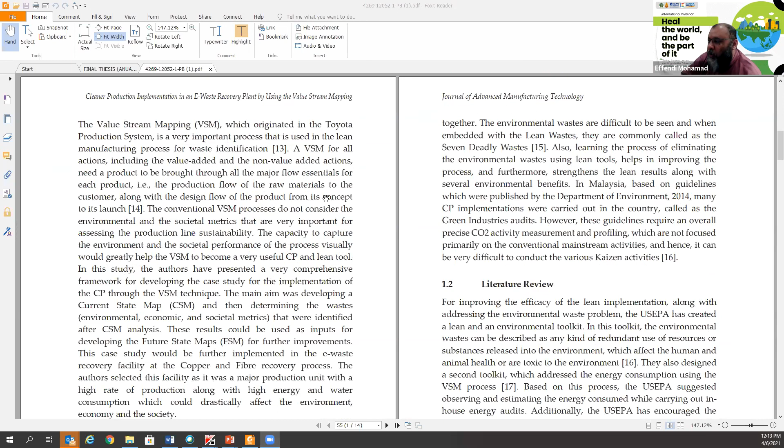Not yet, Professor. Not yet. Yes, okay, this is one of our publications, we have three publications done until now. This is 2017, and we also have 2018 and 2019 for this issue. I will share these publications throughout this conference and webinar so you can read more.